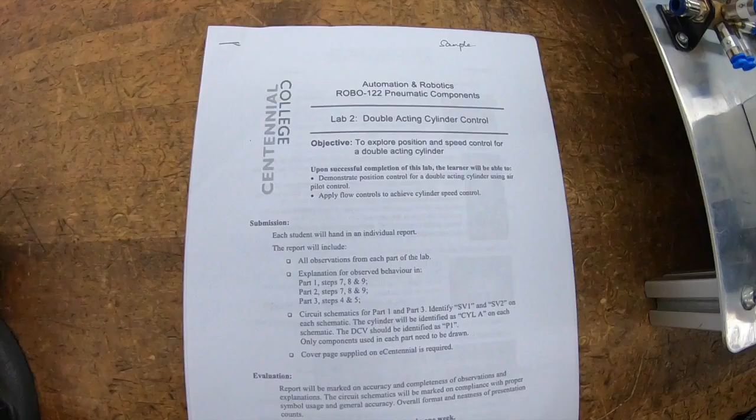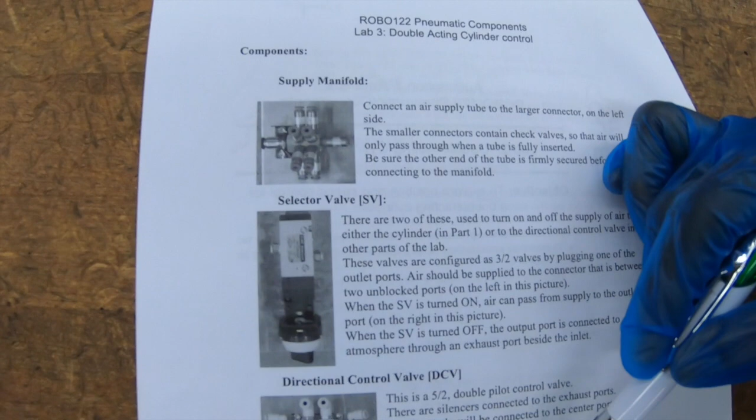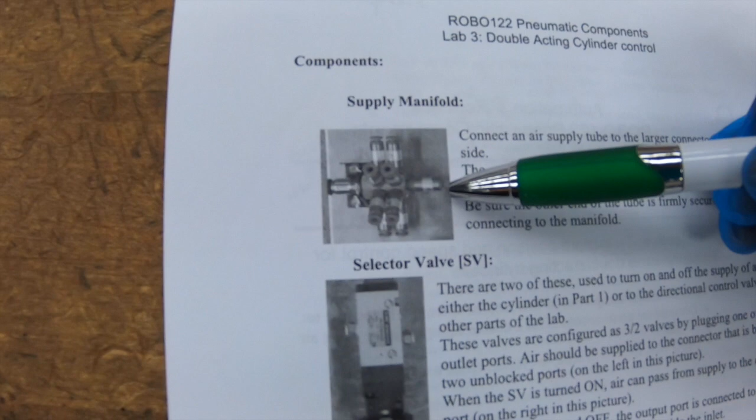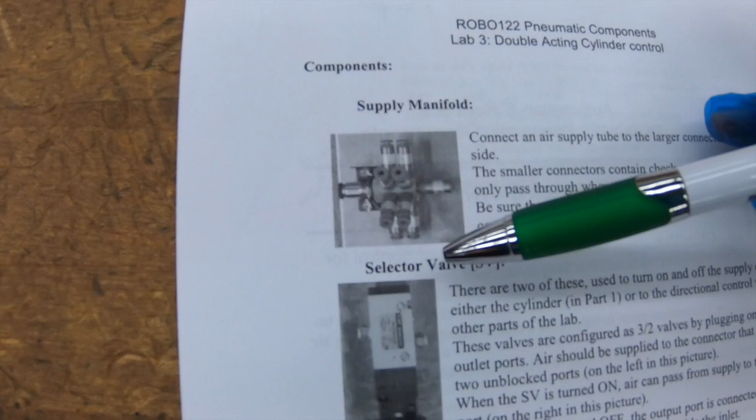Today we are going to do exercise 2, double acting cylinder control for Robo 122. We are going to use all of these modules on the system, and we are going to have double acting cylinder control. This is the air supply manifold. You're going to connect the air supply tubing into this manifold, and we are going to take tubings from these outlets and connect to the selector valve, to the directional control valve, and to the cylinder.

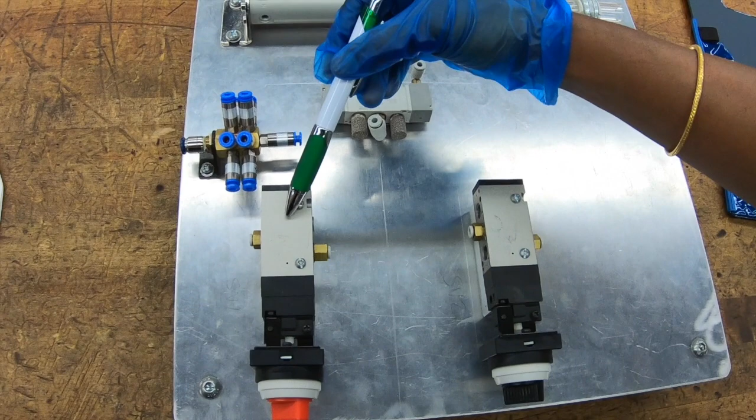This is the system that you would be using. This is the air supply manifold. You have two selector valves. You have the directional control valve here and the cylinder. This is the air supply unit, and the output I am going to take and connect to the air supply manifold on the system. See, we have connected from the air supply unit through this tubing into the air supply manifold.

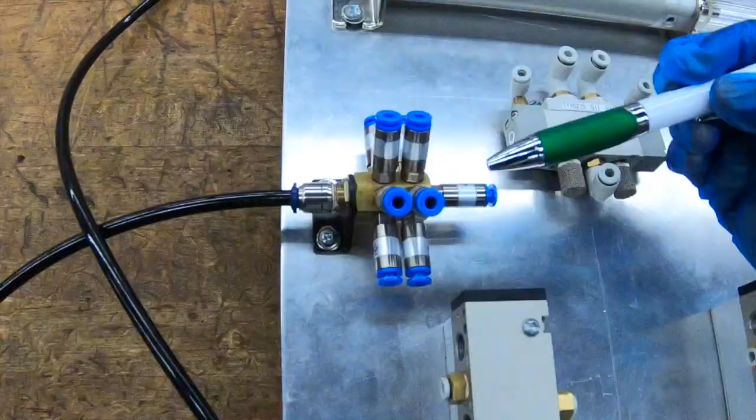Now I am going to take tubings from these outputs. I am going to connect to selector valve 1 and 2. From these two outlets I have taken two tubings that must go to the selector valves. Now I am connecting one inlet to selector valve 1. This is the input side. This inlet I am going to connect to the input of selector valve 2.

This is the cylinder and this is the head end. I have connected a tubing here, just a press, and this is the cap end. I have connected a tubing. Now these two ends I am going to connect to the output of the selector valves. This cap end is going to selector valve 1. The head end is going to selector valve 2.

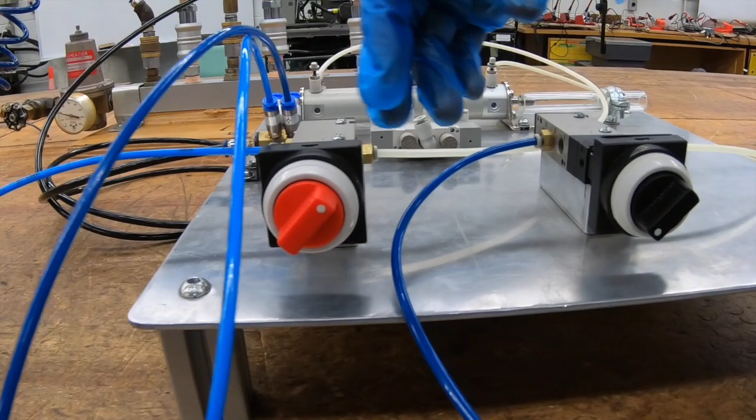Selector valve 1 is off. Selector valve 2 is also off. How do I know these are off? It is from the back of the switches. You see it's not engaged. When I put it to the other side, it gets engaged. So I could say this is the off position and this is the on position.

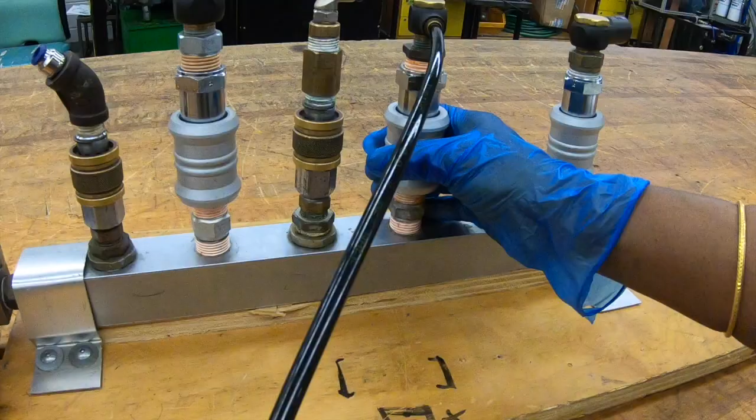Now I'm going to turn the air supply on, and I am switching on selector valve 1. You see the rod extended. Now I am closing it. It is staying the same. Now I can retract it by switching on this. Off, nothing happens.

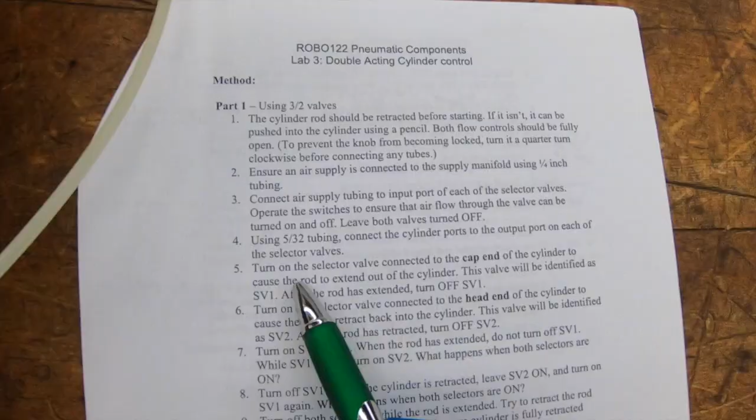Now we are going to do step number 5. We are going to turn on the selector valve connected to the cap end, and then we are going to extend the cylinder. Now both the selector valves are off. This is the one connected to the cap end. I am going to turn it on and I am going to turn it off. Now SV1 is off. Okay. Now the rod is extended.

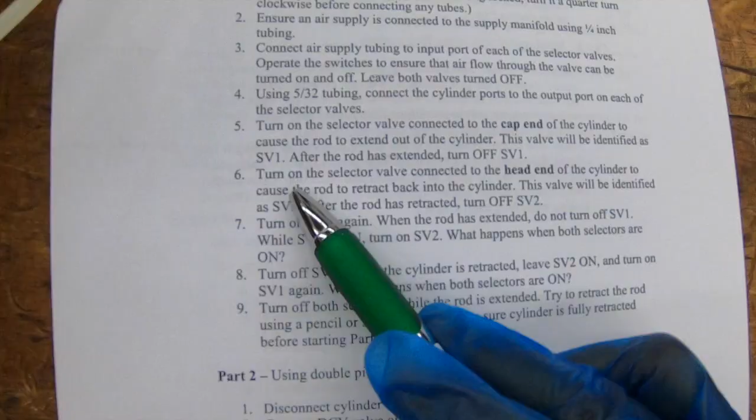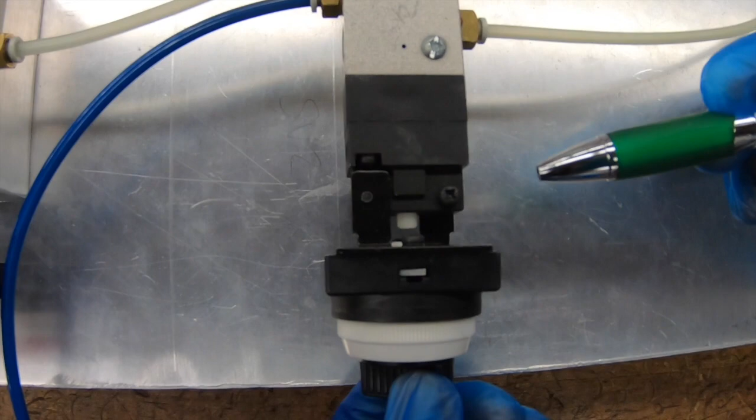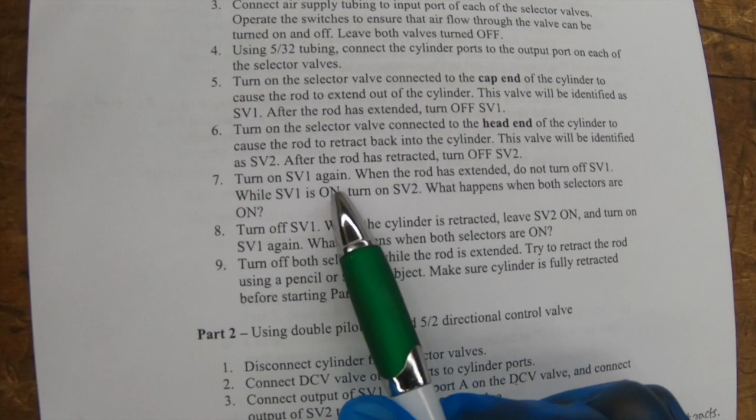Now I am going to turn on the selector valve that is connected to the head end, which is SV2, and I am going to turn it off. SV2 connected to head end, turn on and turn off. See, the rod is retracted. Now step number 7, turn on SV1 again. The rod is going to get extended. I am not going to turn off SV1.

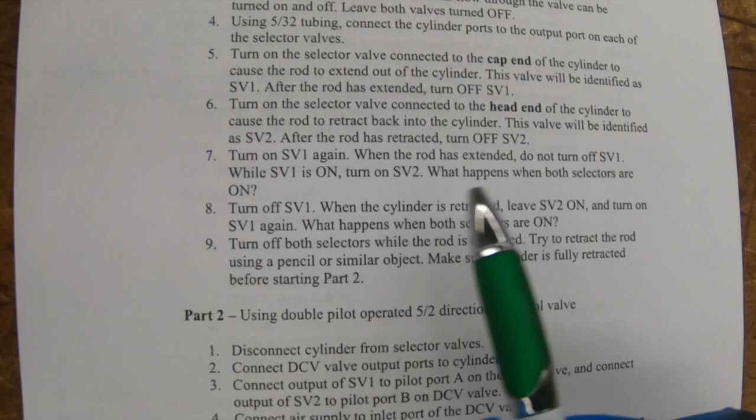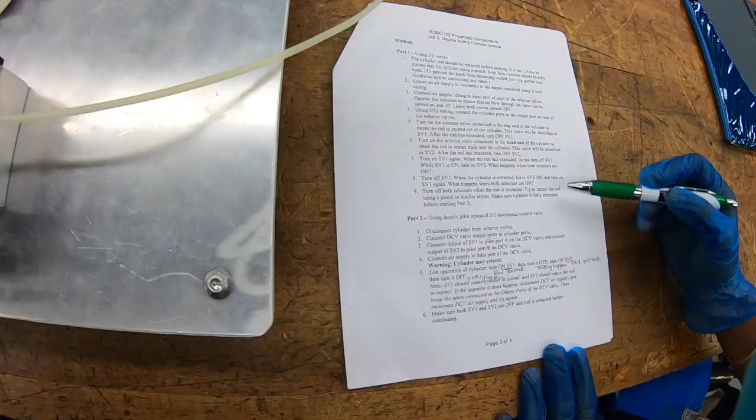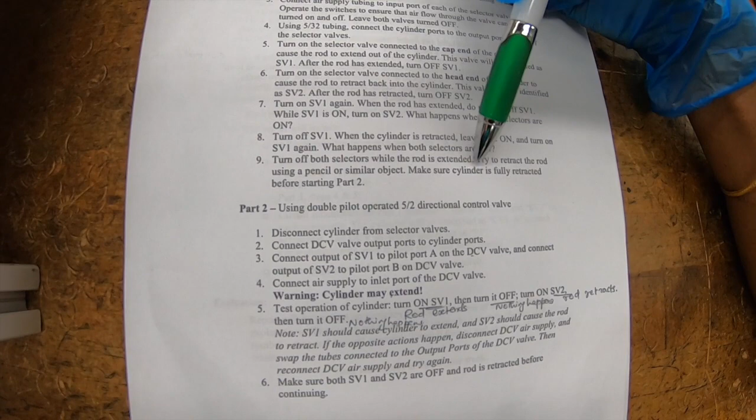When SV1 is on, I am going to turn on SV2 and see what is going to happen when both the selectors are on. Now turn on, the rod extended, keep this on. Let us turn on and off this. Turn on, turn off, nothing happens. Now both SV1 and SV2 are on as per step number 8. Step number 9 is to turn off both the selectors while the rod is extended. We will try it. If the rod is not retracted, we are going to retract it with a pencil or similar object.

SV1 and SV2 are on. I am going to switch off both. I am going to switch off SV2 and then SV1. Note the result. The rod is still extended.

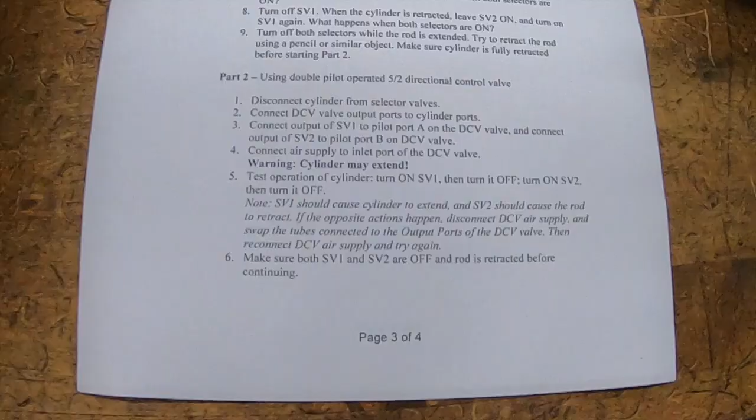Now SV1 and SV2 are off and the rod is extended. I am going to retract it. We are done with part 1. We are proceeding to part 2.

We are going to use a 5/2 directional control valve for part 2. This is step 1 in part 2. Disconnect the cylinder from the selector valves. Now this is the DCV valve. DCV valve output ports should be connected to the cylinder.

From the air supply manifold, I have to connect the inlet port of the DCV valve. Now the output of SV1, I have to connect to pilot port A of the DCV. The output of SV2 has to go to pilot port B.

Now turn SV1 off, turn SV2 off. Now with both SV1 and SV2 off, the rod is retracted. Now I am going to turn on SV1. See, the rod is extended. I am not going to turn off SV1. With this on, I am going to turn on SV2 and I am going to note the result.

Now keeping SV2 on, I am going to turn off SV1 and I am going to turn it on again, and now again I have to note the result. Now with the rod extended, I have to turn off both SV1 and SV2. Note the result. Now if it doesn't retract, you can just turn it on and then retract it.

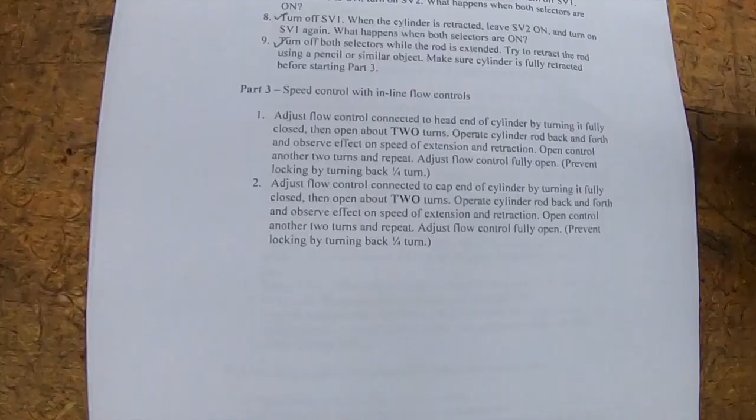Now we are proceeding to part 3, speed control with inline flow control valves. These two are the inline flow control valves. This is the cap end, this is the head end. With these inline flow controls, I can adjust the speed of extension and retraction.

Now initially, I am closing it completely, and I am going to turn on SV1 and see the speed at which it is extending. So open a bit and see, it is extending at a slower speed. Now when I try to retract it, there is no change in speed.

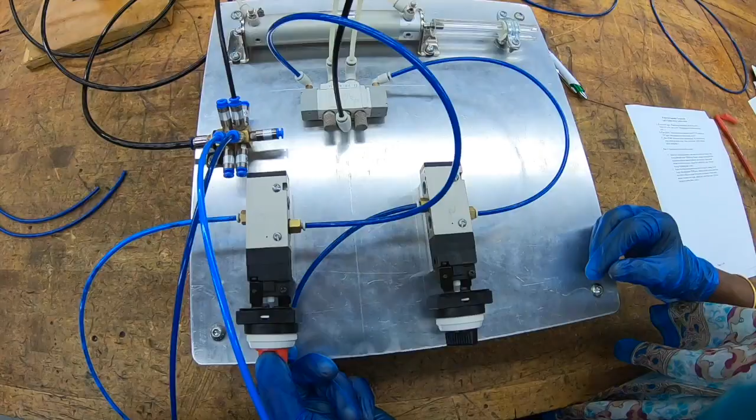Now I am going to open it completely. I am going to close this side completely and try to extend and retract the cylinder. Now I am going to open it 2 turns and again try to extend and retract the cylinder. Now extension speed is not affected, but when you try to retract it, see the speed.

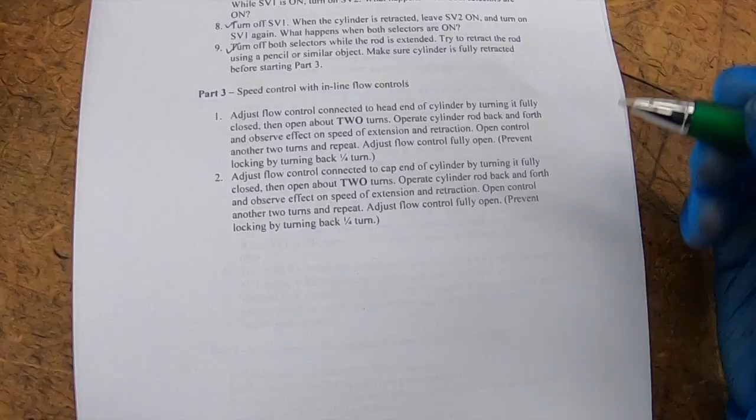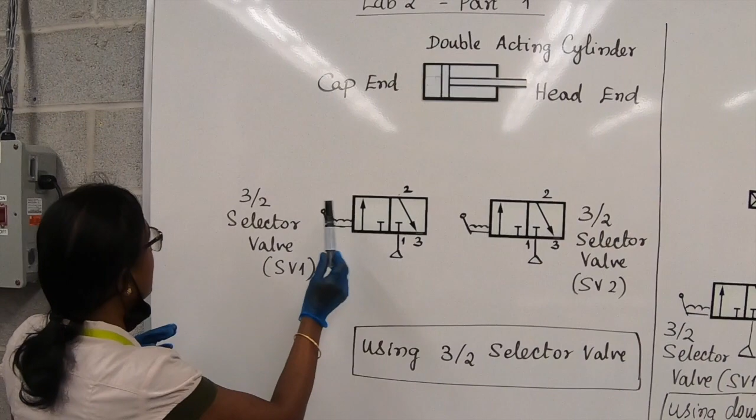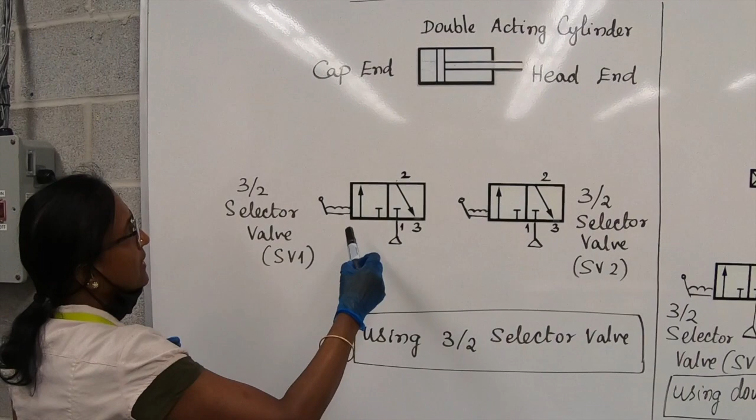Now we are done with part 3. I have shown here the symbols for the 3/2 selector valve. This is going to be connected to the cap end and this is going to be connected to the head end. You are going to figure out how to make the connections. This is the symbol of a double acting cylinder. With respect to part 1, we have only these 3 components connected in the circuit, and you make the diagram for your exercise result sheet.

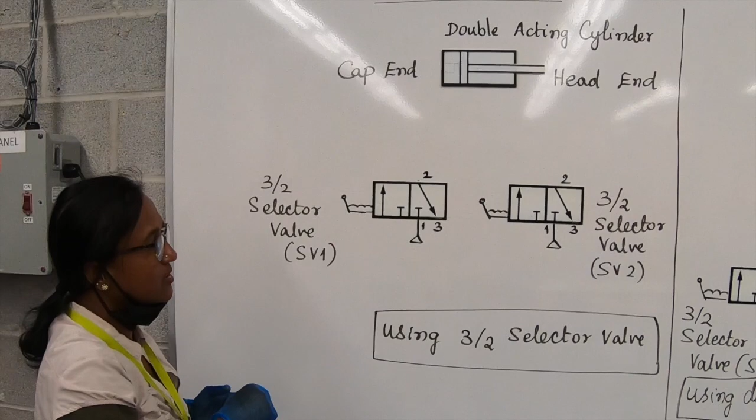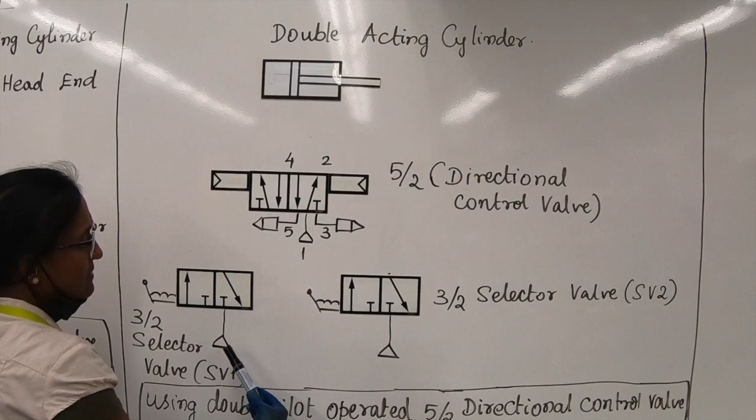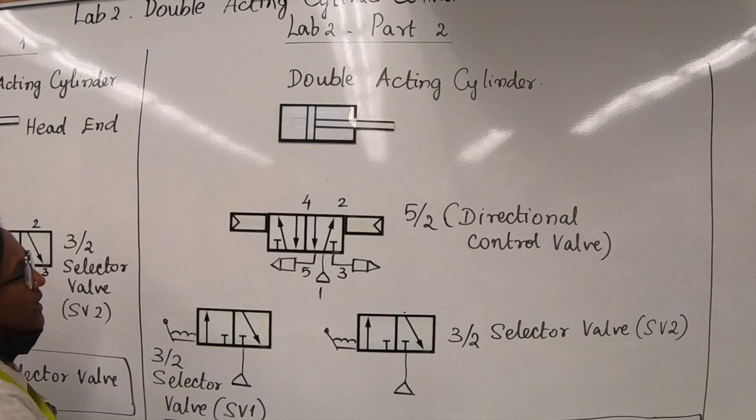In part 2 of this exercise, we use those same 3/2 selector valves, SV1 and SV2. We included a double pilot operated 5/2 directional control valve to control the same double acting cylinder. Again, you have to figure out how to make the connections to control the cylinder function.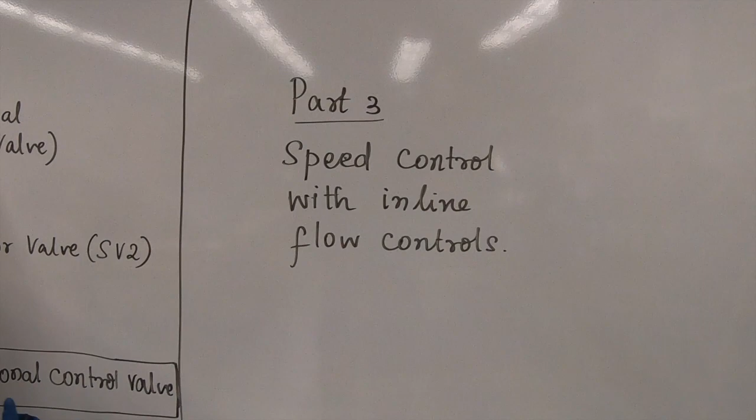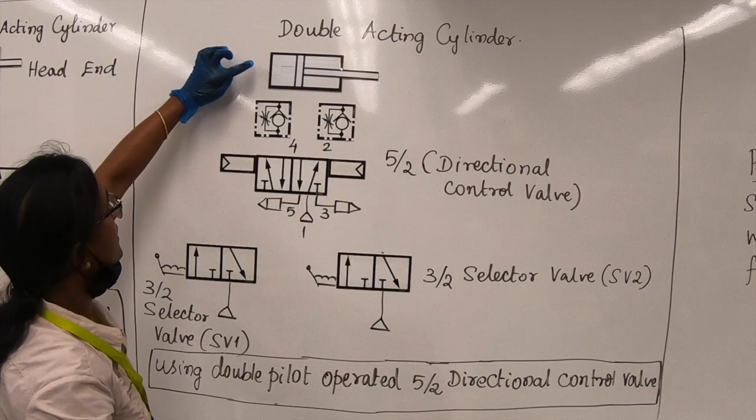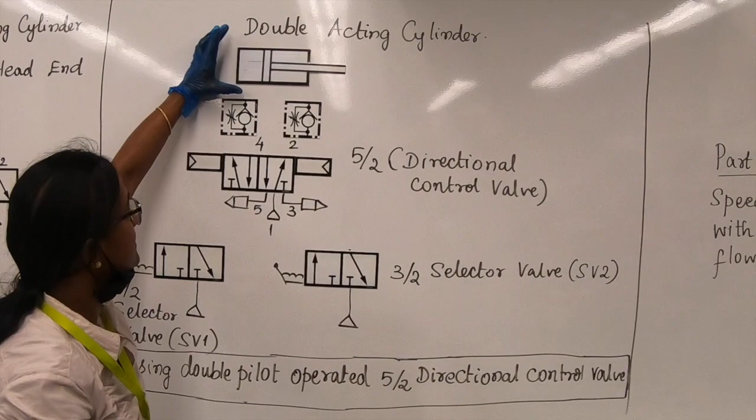Part 3 is speed control with inline flow controls. I am going to show it on part 2 itself. I am adding these inline flow controls between the 5/2 directional control valve and the double acting cylinder, and you are going to connect through these inline flow controls to control the double acting cylinder. We are done with exercise 2, double acting cylinder control.